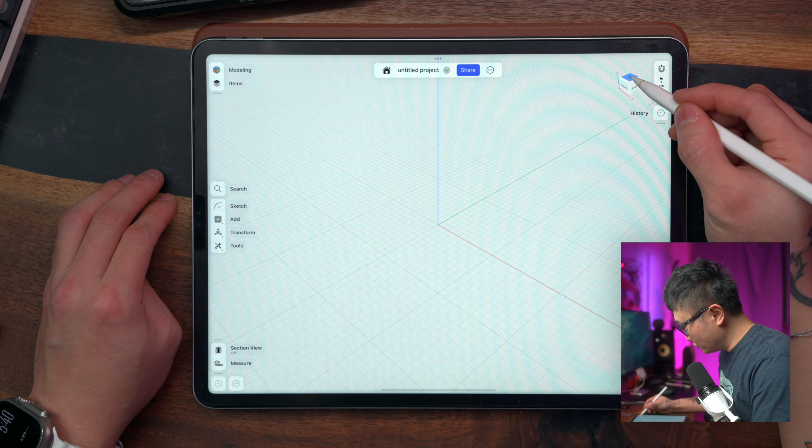We're going to start by going to a top view, and let's zoom out a little bit. Obviously the first thing we're going to do is take some measurements. Let's go ahead and measure this top surface here.

You probably can't tell from the video, but this edge right here is raised up a little bit. If we measure that, it's about 15 millimeters wide. As for the length, we're also just gonna measure to that corner right there. That's gonna be about 25 millimeters.

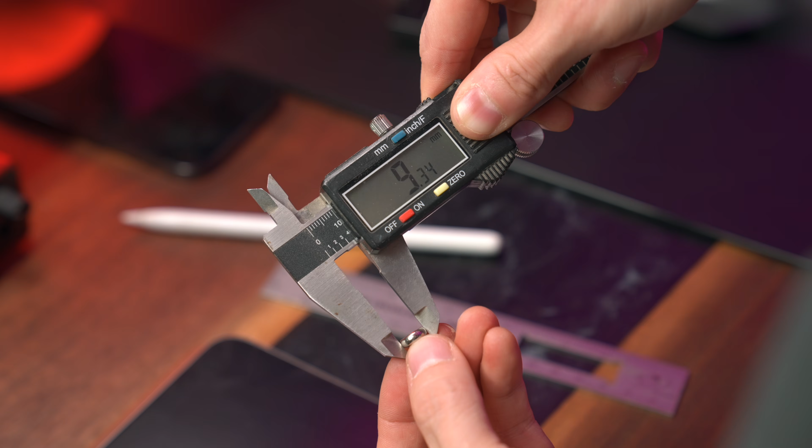Also we're gonna measure the bolt. The shaft is about 10 millimeters long. The diameter is 6 millimeters. The head of the bolt is about 9.4, 9.3 millimeters. And the height of the head is about, let's call it 3.3 millimeters.

All right, now we're ready to go back into Shapr3D. Let's go under Sketch, and we are gonna use a center rectangle.

Make sure that the type is set to center. We're going to start by sketching at the origin, which is different from what we've done in the past, but you'll see why in a second.

So we're just going to drag out like this, and we're going to set our dimensions to 25 millimeters by 15 millimeters, which is the area of the mounting surface that we measured earlier.

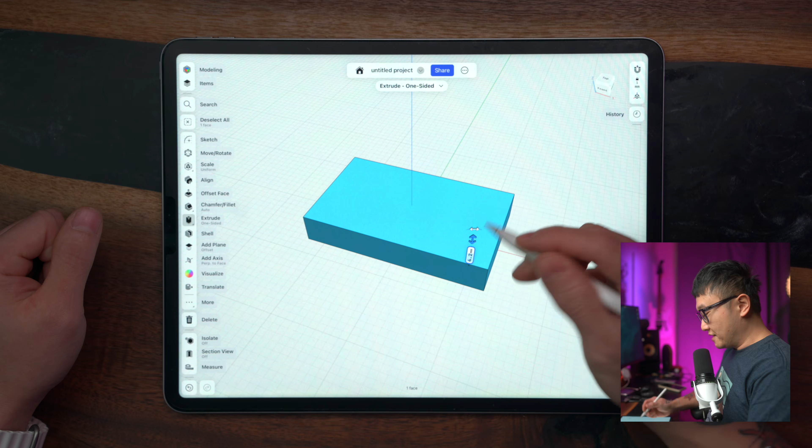Now let's rotate out of that view, and we're going to extrude this up. The length of the shaft of that bolt was 10 millimeters, but we don't have to extrude it that high, so we're just going to set that to 6 millimeters, which should be sufficient.

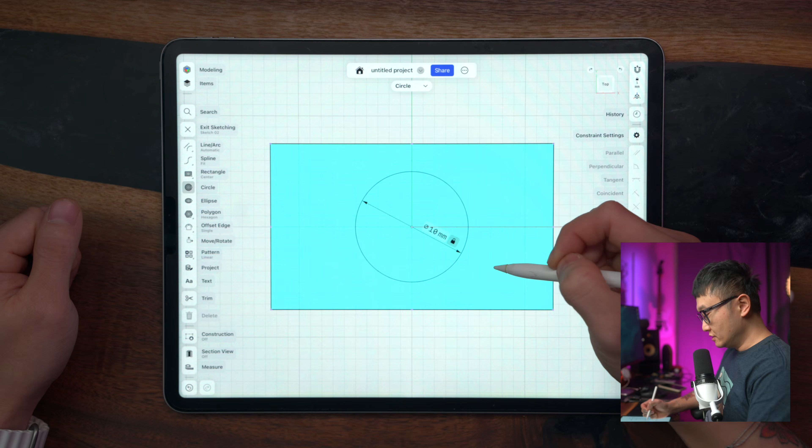Now let's cut the holes for the bolt. Double tap on this top surface, and we're going to use the circle tool. The diameter of the head of the bolt was 9.3 millimeters, so we're going to sketch a circle that is 10 millimeters in diameter, just so we can have some clearance for the bolt to float inside of.

And the height of the bolt head was 3.3, I think, so we're going to extrude that downward 4 millimeters.

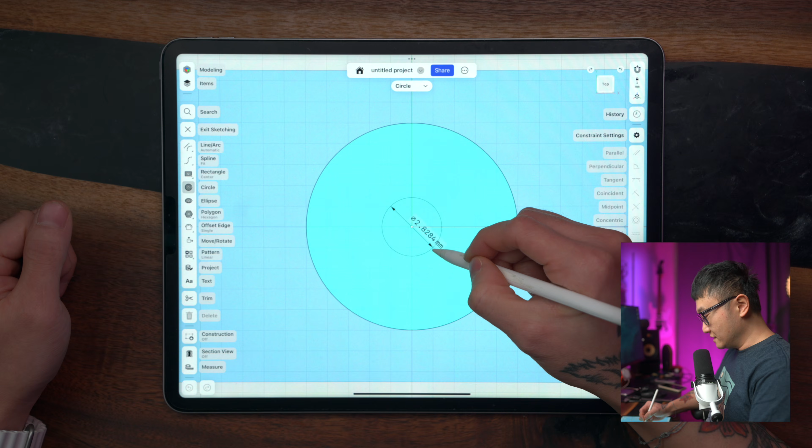Now let's double tap on that new surface we just created, and we're going to draw another circle on the inside. This is going to be the hole for the shaft of the bolt, which had a diameter of 6 millimeters, so we'll make that 7 millimeters, once again just to prevent the bolt from binding inside. This time we will push that all the way through.

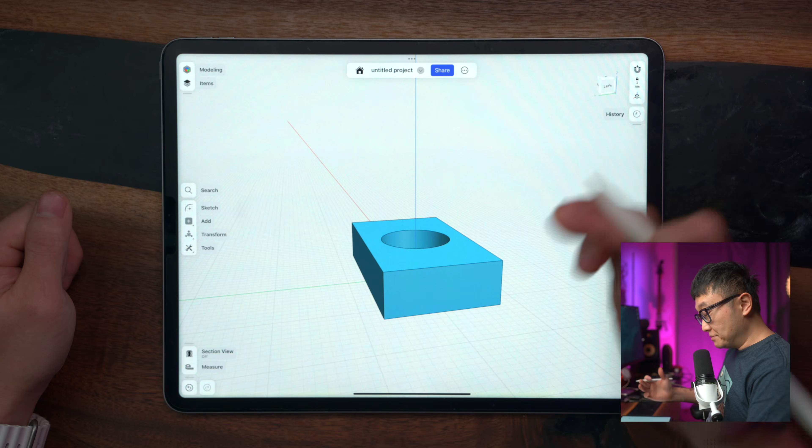All right, so we have our main body. Now, if you remember, there's not a lot of room between the top of the monitor and the bottom of the camera lens, right? So it'd be best if we can route that cable behind the monitor.

So what we're going to do is model a couple clips on the back side of this main body for holding the cable this way. To do that, let's double tap on the side face and start sketching on that. The first thing we're going to do is turn construction on, so that anything we sketch just becomes construction geometry.

We're going to sketch a line starting on this edge right here, and just make sure that we're not snapping to this midpoint right here, because we want to be able to grab this point and move it up and down.

Also notice how this line is not horizontal right now. Tap to select it and use the horizontal vertical constraint to lock it down to horizontal, so that when we grab and move it, it stays horizontal.

The length of this line doesn't really matter, but we can lock it to 15 millimeters, just so that we can lock it in place. Now let's turn the construction off.

Remember, the clip we're going to be drawing is going to look like this, for holding the cable. So we're going to use a circle tool. I already measured the diameter of the cable, and it was 4.4 millimeters. But the circle we're going to draw, let's go back to normal to that sketch.

The circle we're going to draw first is actually going to be 8 millimeters, and we're going to draw it on this line. Once again, make sure that we're not snapping to any other points on this line, because we want to be able to move this point along this line.

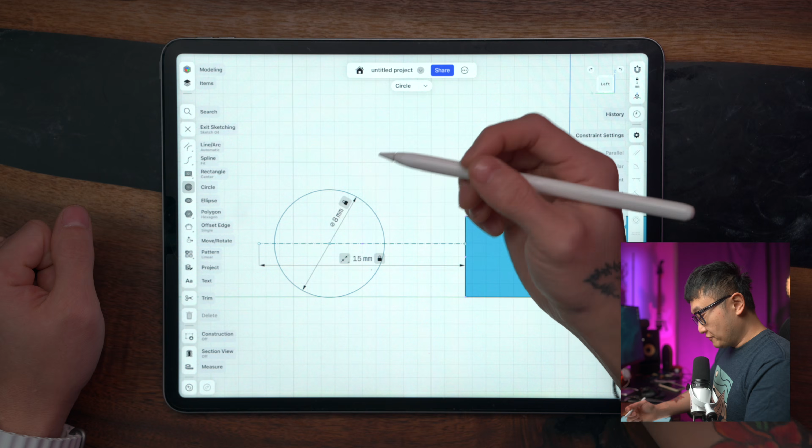And for now, we are going to set this distance from the center of the clip to the edge of our body to 5 millimeters for now. We'll change that later once we see how everything looks.

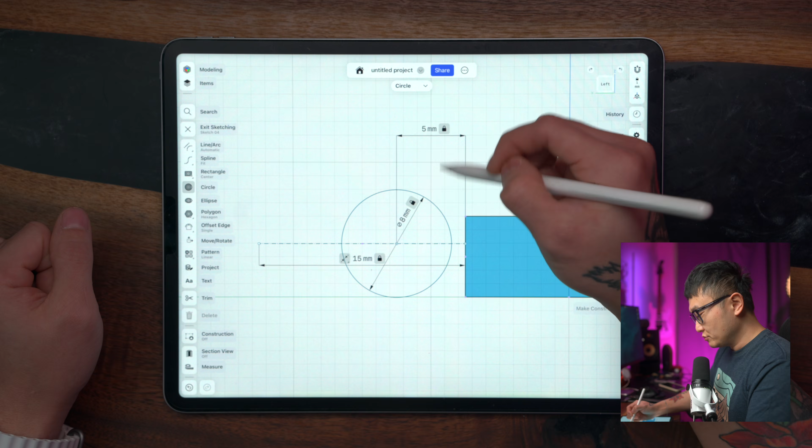Okay, we're going to switch back to the line tool, and we're going to draw 2 lines. Let me zoom in here so you can see better. One from this point on the body to our circle, and another line from this point on the body to our circle. We want to make both of these lines tangent to our circle.

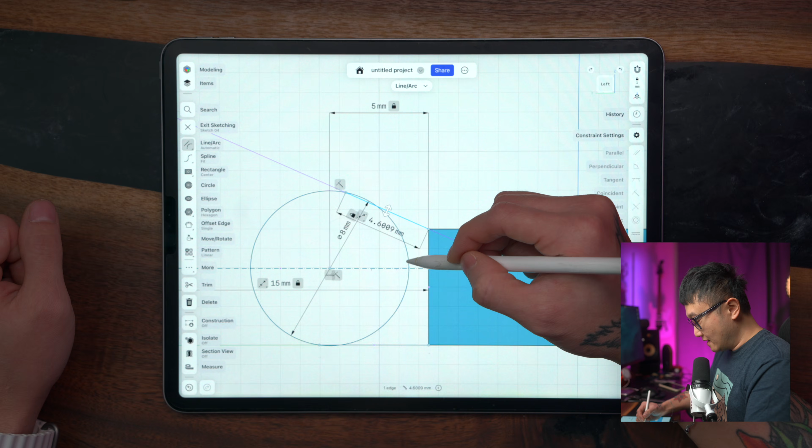So let's select this line and the circle, and we're going to use the tangent constraint over here. And we're going to do the same to this other side as well.

Now let's switch back to the circle tool, and we're going to draw another circle inside this larger circle, starting from that same center point. This time we're going to make that circle 4.5 millimeters. This is the circle that's going to actually hold our cable, so it's just slightly larger than the diameter of our cable, for tolerancing.

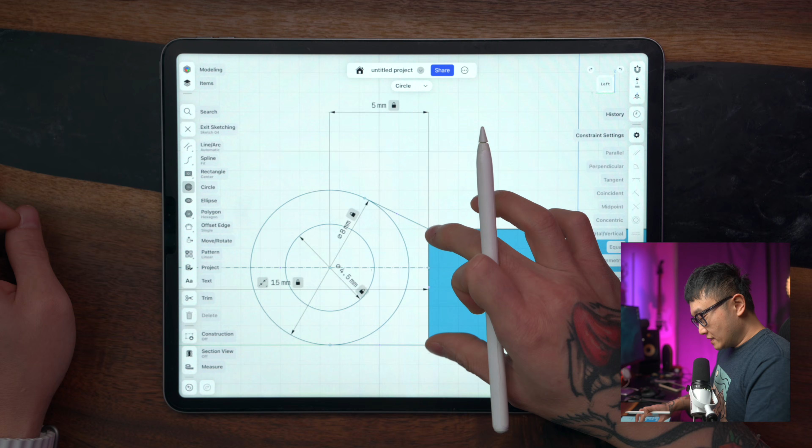Once again, we're going to switch back to the line tool. Sorry about all this switching back and forth, but it is what it is. We're going to draw 2 more horizontal lines on either side of the construction line we drew earlier. Just make sure that they're horizontal.

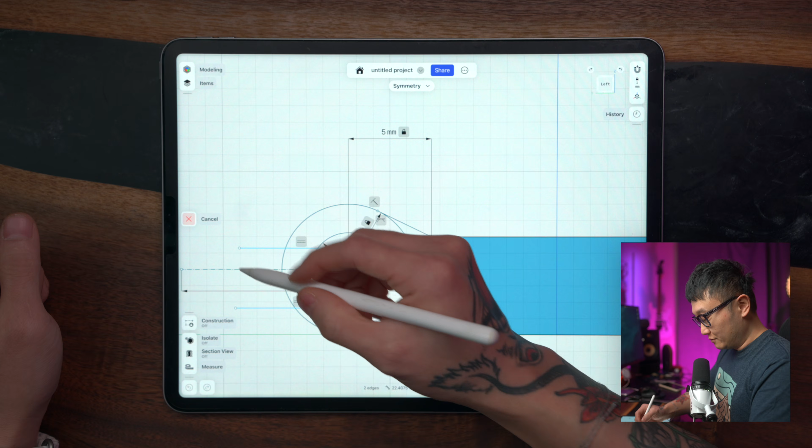Select both of these and use the horizontal vertical constraint. Also, we want to make sure that both of these lines are symmetrical about that construction line. So select both lines, then use the symmetry tool over here, and tap the line that we want both of these lines to be symmetrical about.

You see how they shifted, right? Okay, so now if you select one of these lines and move it around, you see the other line moving with it, right? All right, cool.

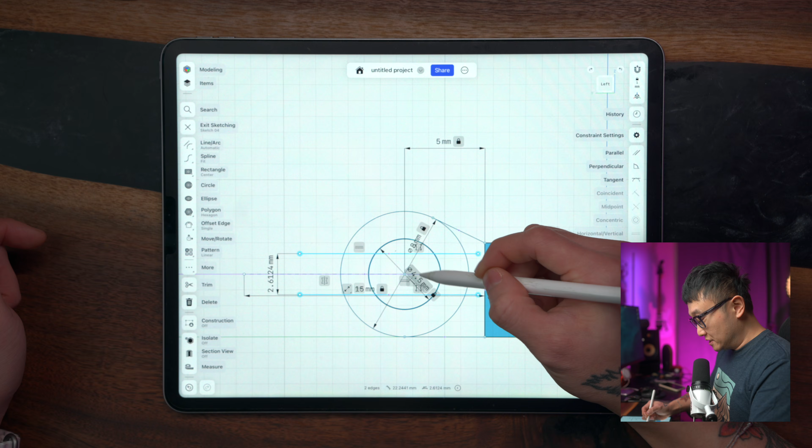Now we want to set the dimension between these two lines to be 1 millimeter smaller than the diameter of the circle. So we're going to set that to 3.5.

Just so you know, I am completely guessing about these values. I have no idea if these are going to work. We're going to print it, test it out. If it works, great. If not, we're going to come back, make changes, print it again, test it out, and so on. It's just how engineering works.

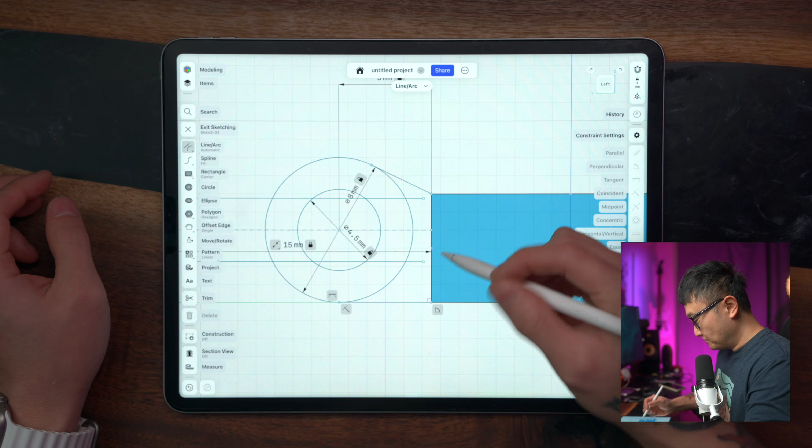But you guys remember that we have this raised lip on the mounting surface of the monitor, right? That means we can't have this clip coming straight out like this, which was why we made this construction line floating. So we can just grab this end and move it, or... okay.

I was wrong. So somehow, maybe it's because we locked this. Let's unlock that. And now let's try to move it. Still no? That's weird. So something is locking it in place.

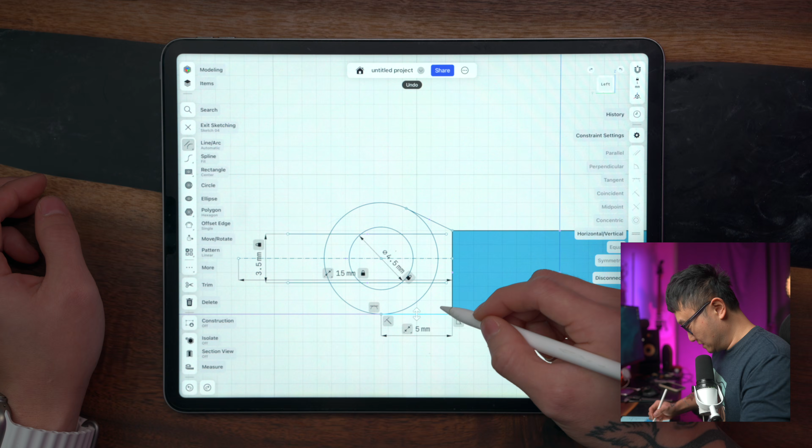Oh, you know what? For some reason, this line here is horizontal. Let's undo that real quick, bring back all the other constraints. It's because of this constraint right here, this 90-degree constraint. So let's get rid of that guy.

Select that constraint and use this delete constraint right here. I don't know if you guys have the same constraint, but I did when I made this. So that's why I couldn't move this.

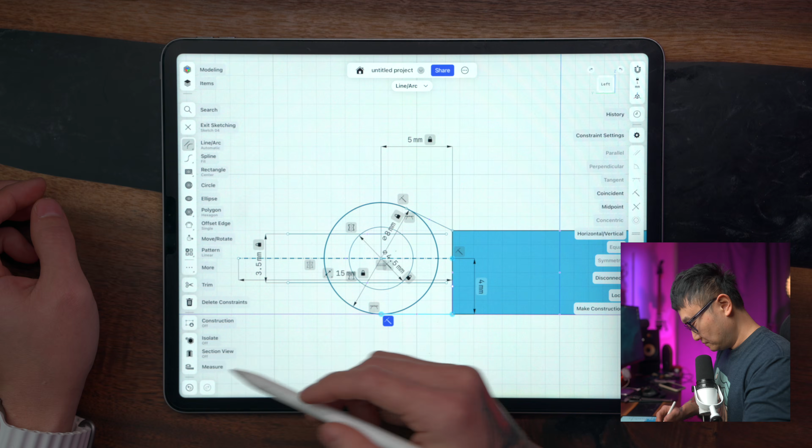So now, okay, still no. Maybe it's this one right here. So I'm going to delete that constraint. Let's try again. There we go.

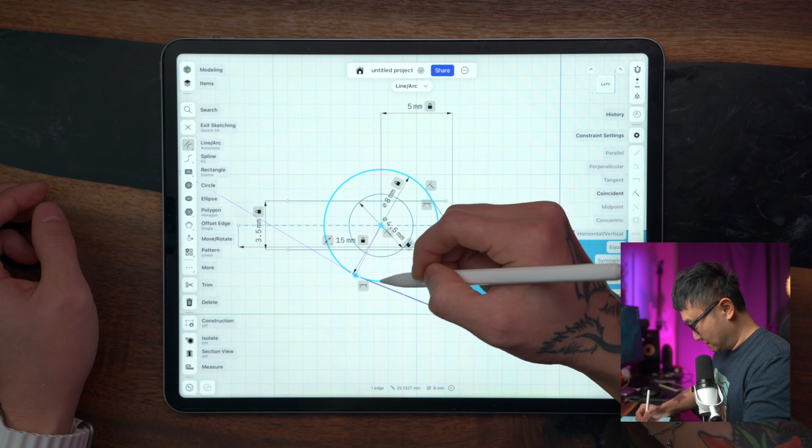For some reason, make sure that these two are coincident again. Those two constraints were messing with each other. Okay, now everything's back to normal. It was mainly that 90-degree constraint I had there.

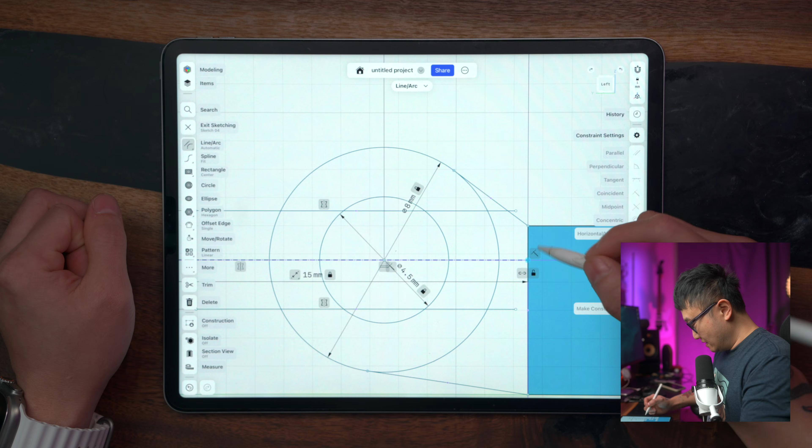This was the main reason why we left this one floating, so that we can move this one around and get away from that raised lip on this monitor right there. Let me zoom in here. I want to move this as high as possible without it actually snapping to that top corner, so I'm going to set this distance right here to 0.5.

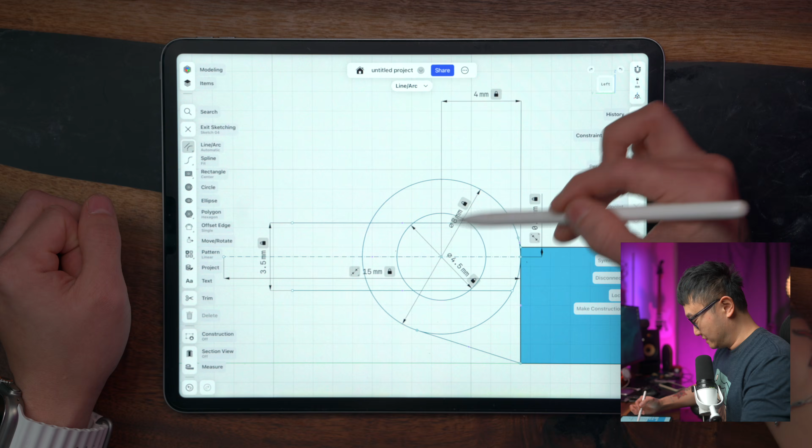I also don't think this clip needs to stick out this far, so let me see if I can change this value as well. I'm going to change that value to 4. So basically it's almost tangent. Oh yeah, it is tangent to that edge. Everything looks pretty good now.

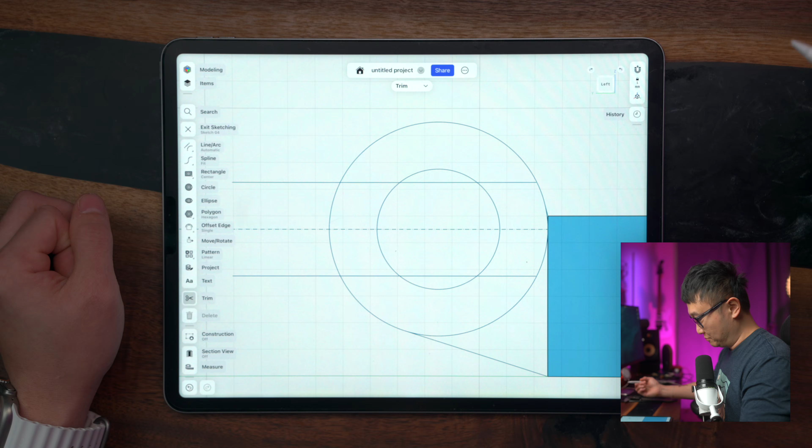I'm going to use the trim tool now to cut away everything I don't need. So let's select the trim tool. Let me zoom in here so you guys can see how I'm trimming this. It's a little hard to visualize exactly what we need to trim away, but the best way is to just start with the things that are obvious that we don't need.

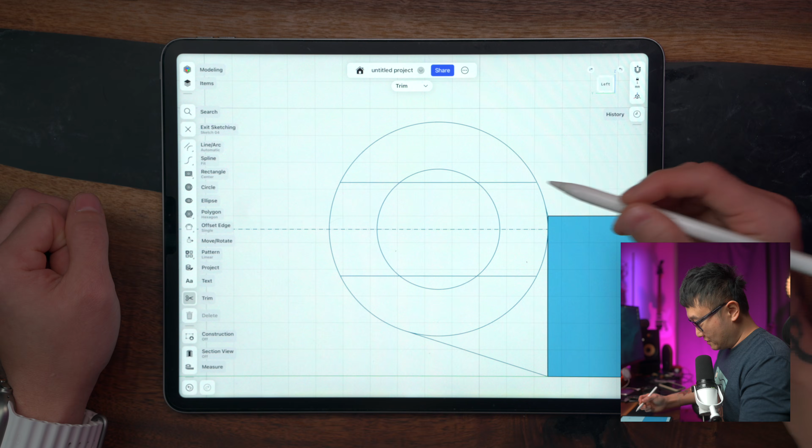So things like this - oops, there we go. Things like this, definitely don't need that. So we have the clip coming out like this, definitely don't need that. The cable is going to sit in here, so definitely don't need that.

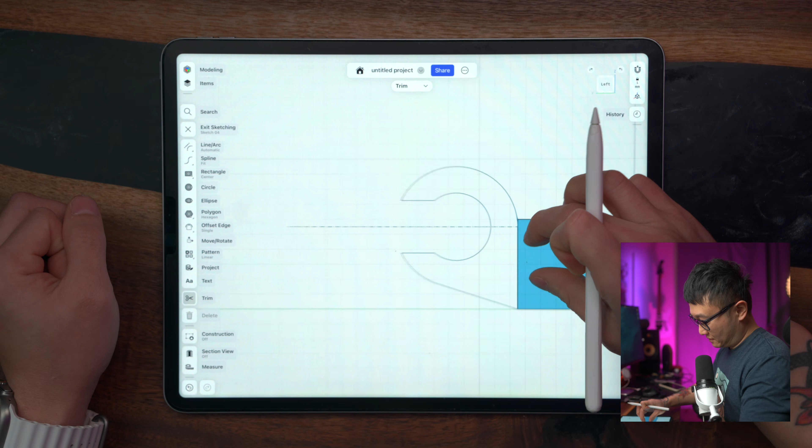There we go. The clip is going to look something like that. And don't need this. All right, that looks pretty good.

Drop the trim tool. I think one last thing I don't like is this corner here because of how sharp, how abruptly it ends with the body. It's going to cause a lot of stress here. I mean, it's not going to see a lot of stress, obviously, but still, I just don't really like it.

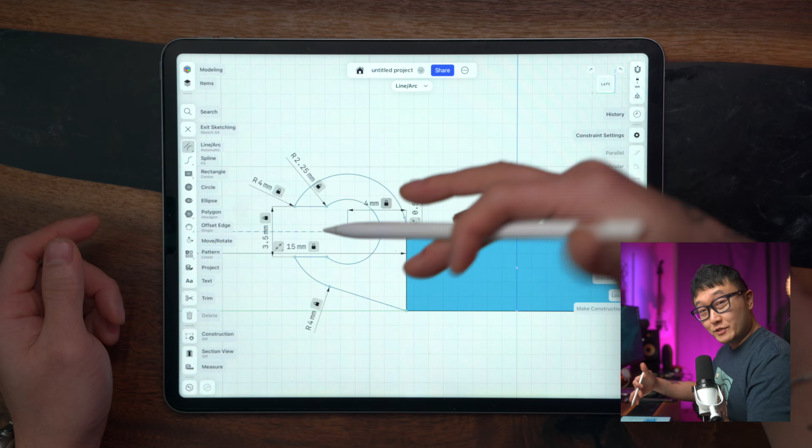I think what I want to do is draw a line. Oops, yeah, I need one of those sketching gloves. But it's actually a good idea - if you use the iPad with Shapr3D a lot, it's probably a good idea to get one of those gloves.

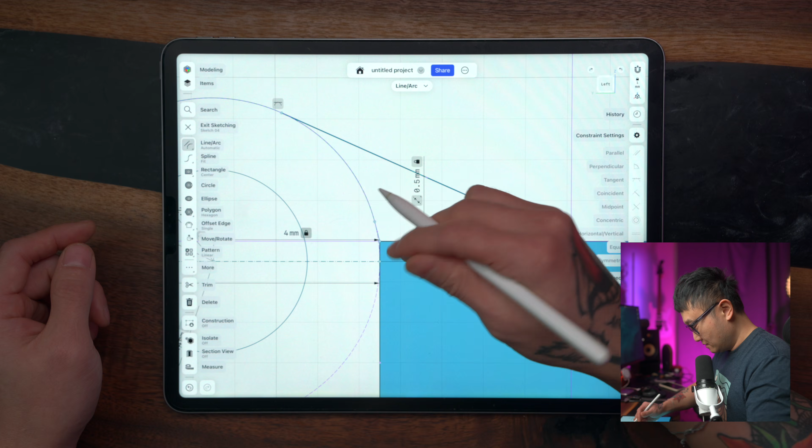I'm going to sketch a line from the top of the clip to the top of our body like this. Let's select that line and the top of the clip and make them tangent to one another. Let's set the distance between that point and that corner.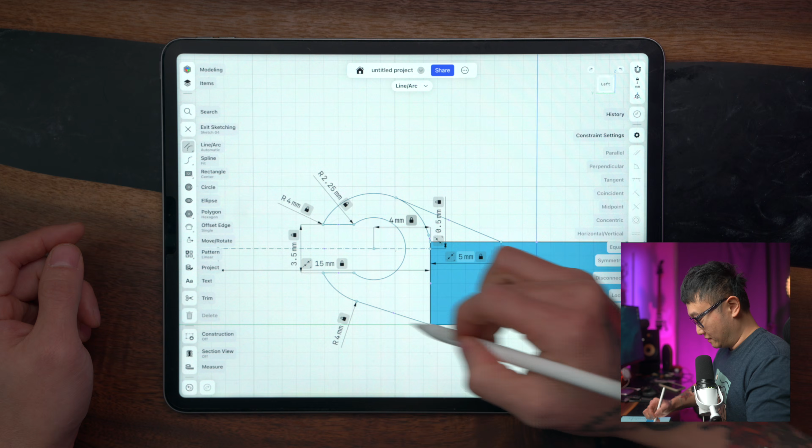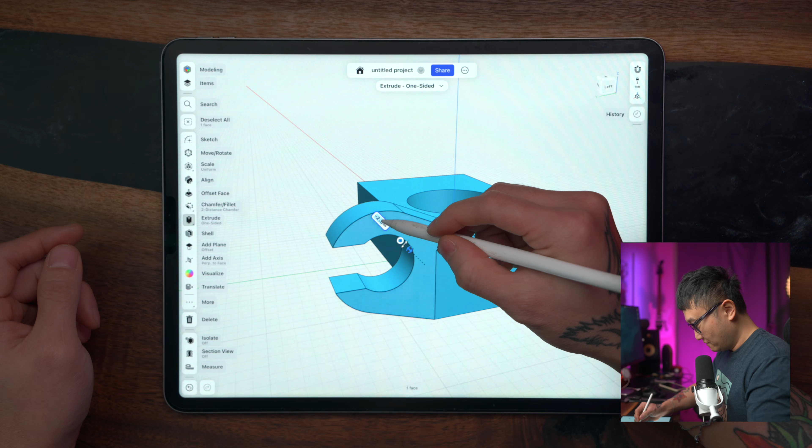Yeah, let's do 5 millimeters. So that's almost parallel to the bottom face, right? And let's go back to the trim tool again and trim away this stuff that we don't need. Oh yeah, and I think we need to close off this sketch here. Okay, now let's exit the sketch. And we're gonna extrude this guy out 5 millimeters. Okay, that looks pretty good, I think.

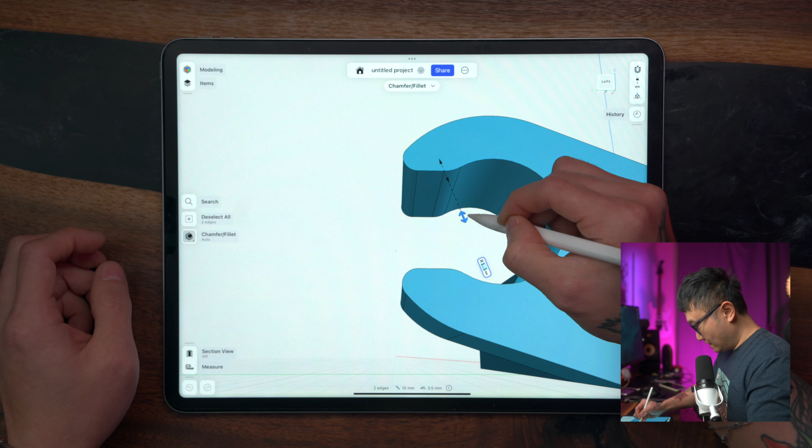Let's add a couple of roundovers to finish up this guy. So for these outside edges, we're going to do 0.5. That looks pretty good. And then for these two inside edges, yeah, 1 millimeter looks good. All right, now let's double tap on this guy. And here's the reason why we model this at the origin.

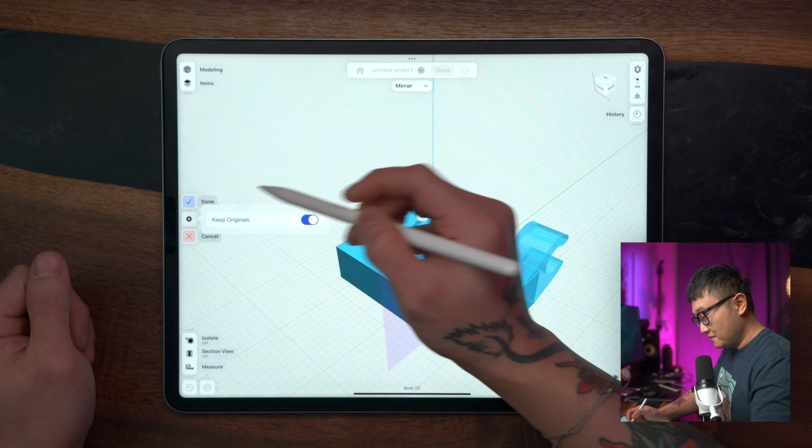So now we can use the mirror tool. Now we can simply use this plane right here at the origin to mirror this guy over. We don't have to create a separate plane. So it just makes things a lot easier when you're creating stuff like this. And make sure that Keep Originals is on and click Done. There we go. Our part's almost done.

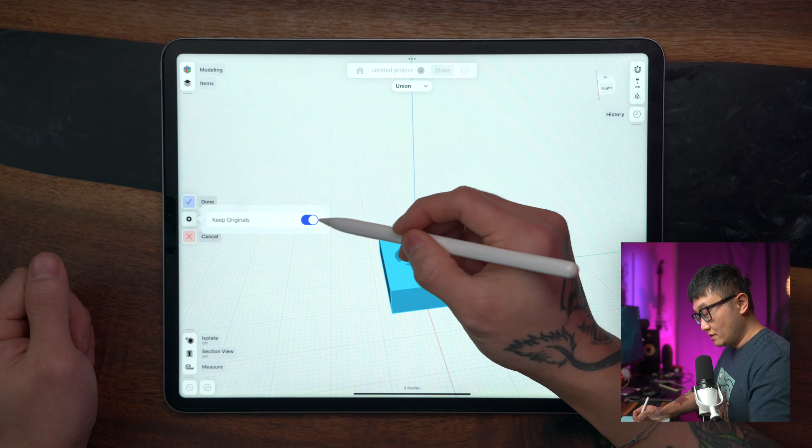Now all we have to do is drag to select everything. And we're going to come down and use the Union tool to combine them. So when you're using the Union tool, we have the option to select Keep Originals on or off. So if you open up the Items Manager, you see we have 3 parts selected, right? If you keep Originals on and you click Done, we have a 4th part now. So we have the 3 original parts and a 4th part that's a combination of all 3.

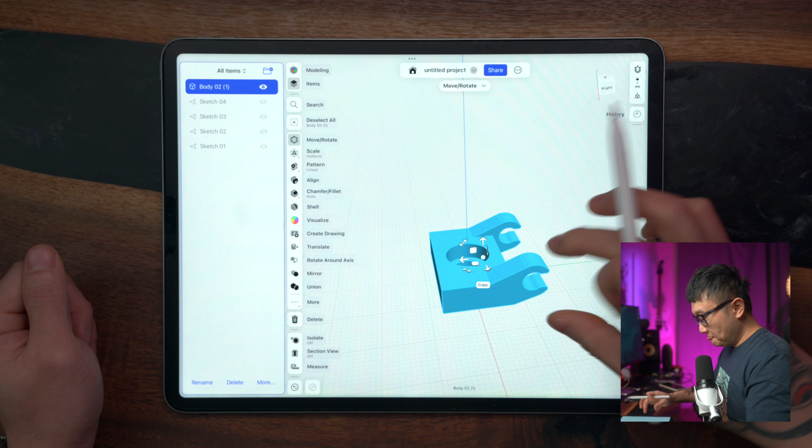But let's undo that real quick. If we select all of them, use the Union again, if we do Keep Originals off, click Done, then we just end up with 1 single part. For this particular example, since this is our final part, I'm just going to keep Originals off. It really doesn't matter. But just keep that in mind, depending on what project you're working on. Sometimes maybe it's a good idea to keep the Originals on if you want to do any modifications and stuff like that. But now let's add some roundovers and finish this guy up.

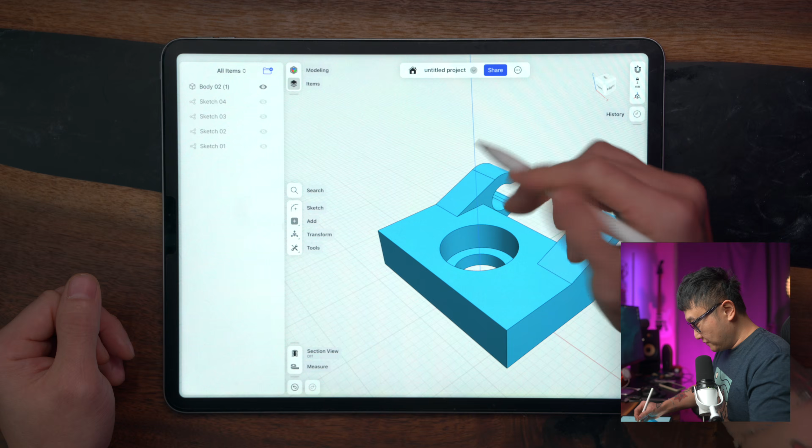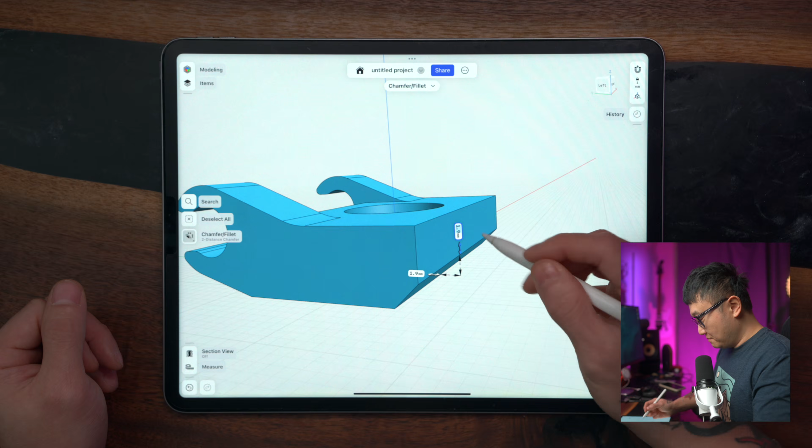Let's select those. Let's close that up. Let's do 5 millimeters for that. And I'm also going to add some chamfers. I'm a really big fan of the 2-distance chamfer because they're a lot more fun than just a boring 45-degree chamfer. They're sharper and you can modify the values in the history sidebar here. And they just look a lot cooler. Oops, let's make that 2 and make this 3. See? They just look a lot cooler, right?

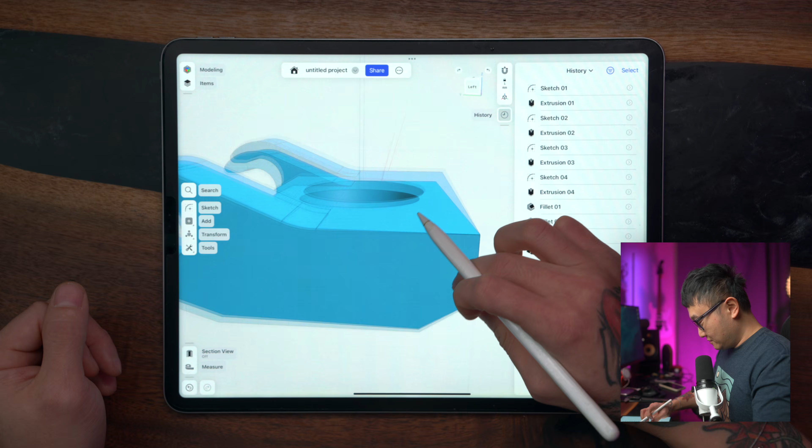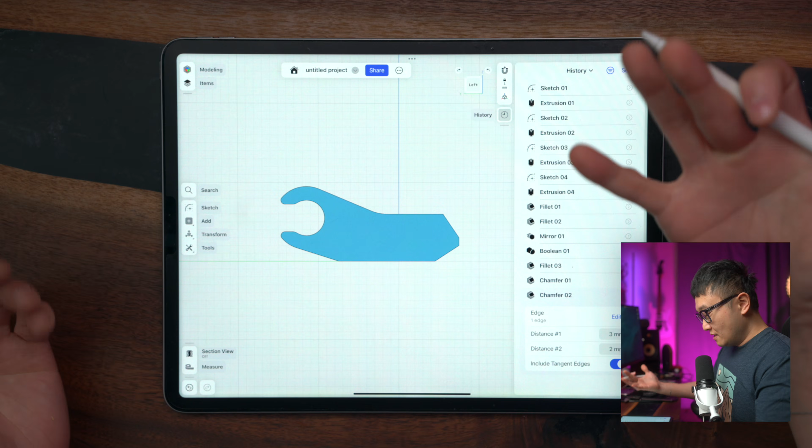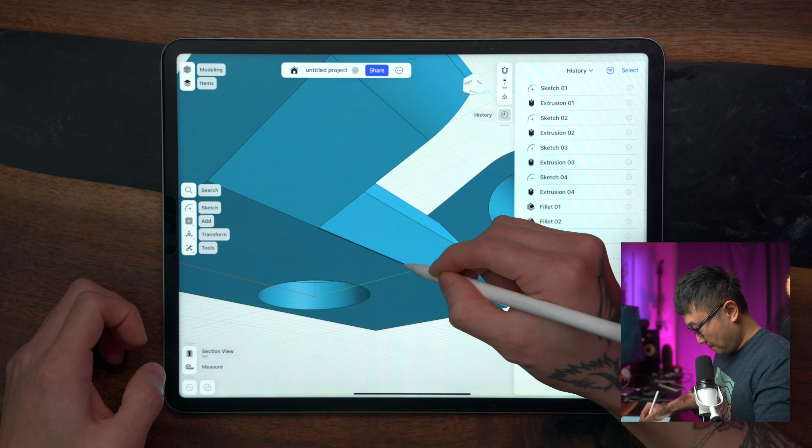Let's do the same thing to the top as well. So we'll make the top maybe 2, and then make the bottom 3. Something like that. Yeah, you just get a lot more freedom with it, and it just looks more custom. See what we can do with this. Oh, I don't like this. I think something's weird with our sketch. The way the bodies are combined together, it's not letting us create a chamfer down here.

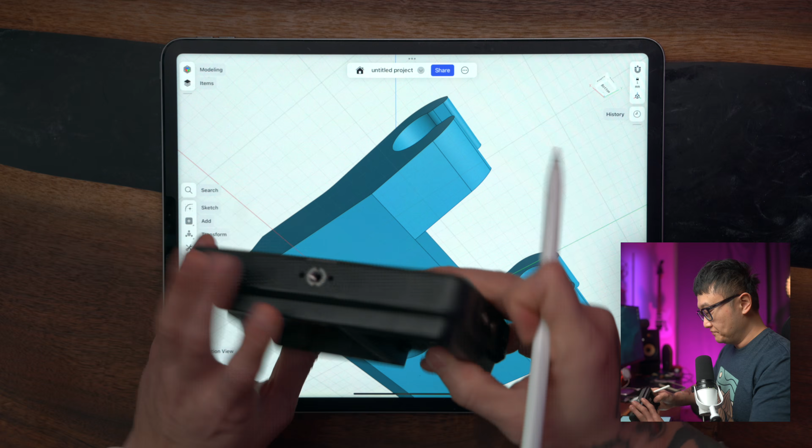That concerns me just because this is going to be right on that lip that we have right here. I want to make sure that we are definitely going to get away from that lip. And this is why I'm really glad that in Shapr3D, our sketches are directly linked with our bodies. So we can come back in here and make changes a lot easier. So let's go to our history sidebar and come to the sketch that controls that part.

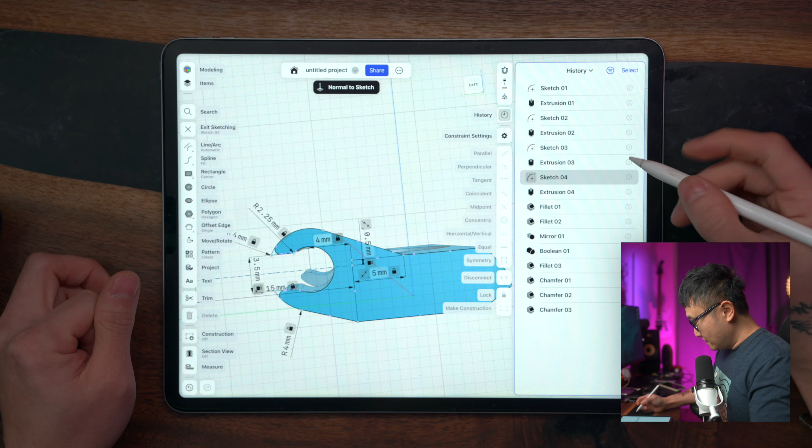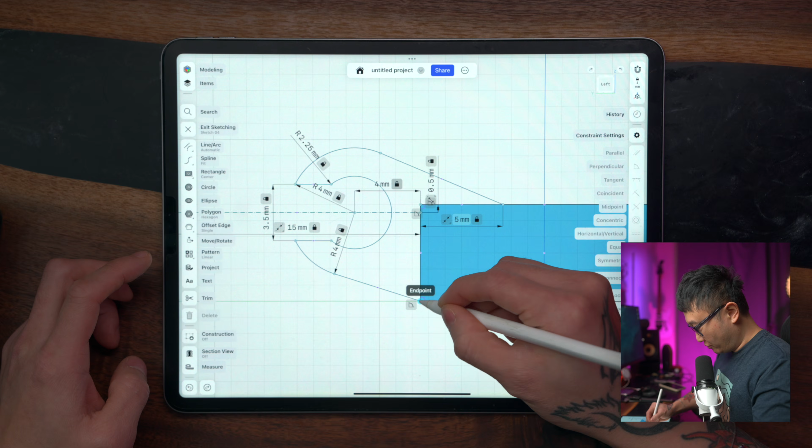And what we can do is hold down on that sketch, and we are going to insert a breakpoint. Once we do that, it hides all the steps below it so that all we see is that sketch. So we're going to just focus on that. And let's go normal to that sketch. So I'm going to tap on that point right there, and I'm going to see if I can move that point. Why is that? Okay, there we go.

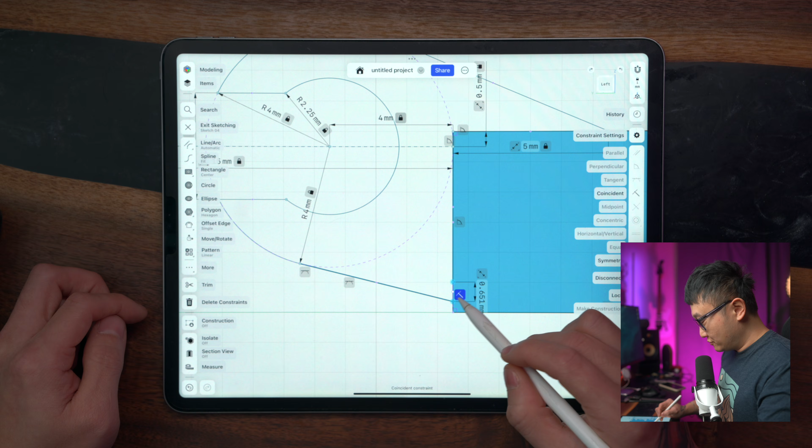If that point for you is locked on there, what you have to do is select that constraint right there, and you want to delete that constraint, okay? That's the coincident constraint. Once you delete that constraint, you'll be able to move it along that line. As you're moving it along that line, just make sure that you're not changing anything else, that this thing isn't flying off the page. If all the other constraints are done correctly, you should be able to move this around, and the only thing moving is this point right here. Oops, my bad. So it should look like this.

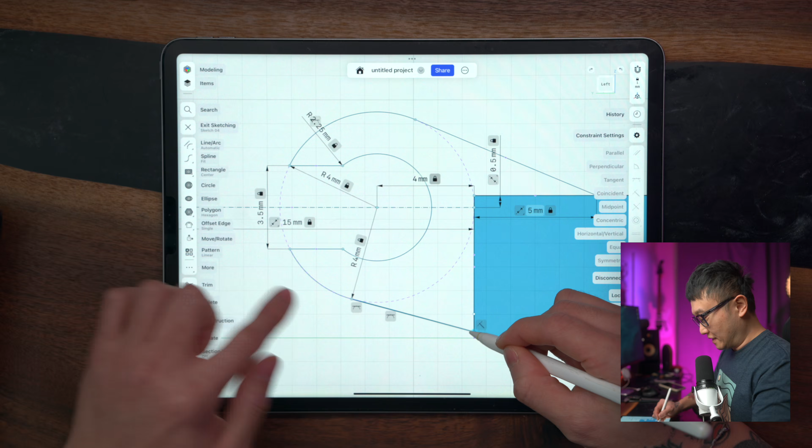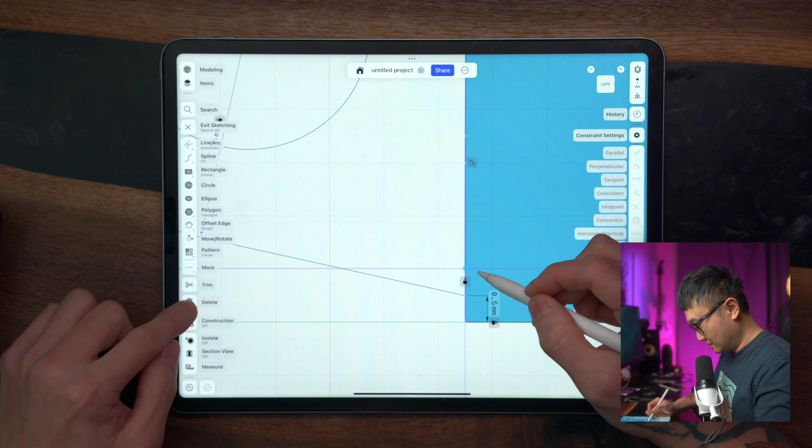I'm just gonna make this distance 0.5, like that. I don't know what that point is right there. I'm just gonna delete it. So I'm basically just getting it off that edge. Let's exit that sketch. And I'm going to get rid of that breakpoint. Once I get rid of that breakpoint, you see that whole tree refreshes, my part basically refreshes, and you see the whole part updates, right?

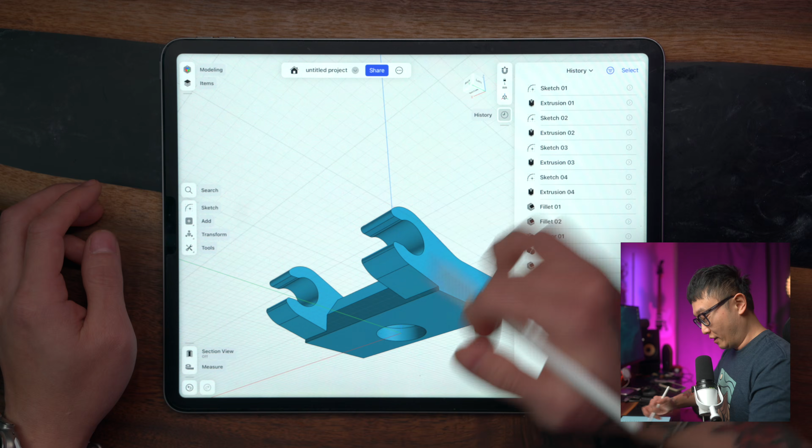That's a great thing about parametric modeling. Such an easy process, right? Okay. Now we should be able to add a chamfer down here without any issues. So let's drag this bottom chamfer back. See what we can do, how far we can drag this guy.

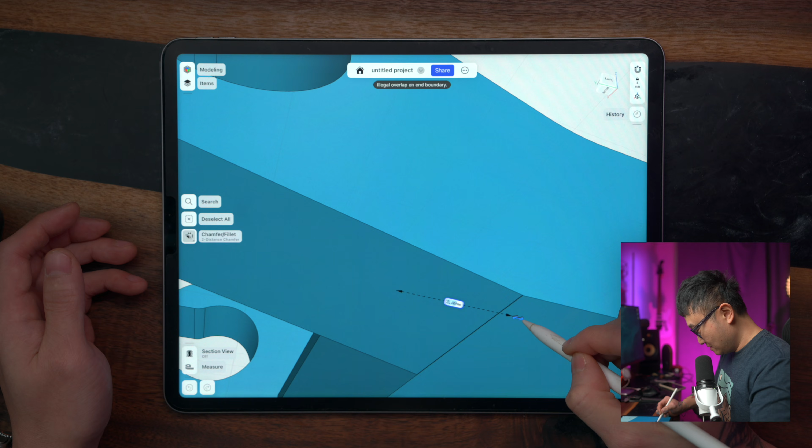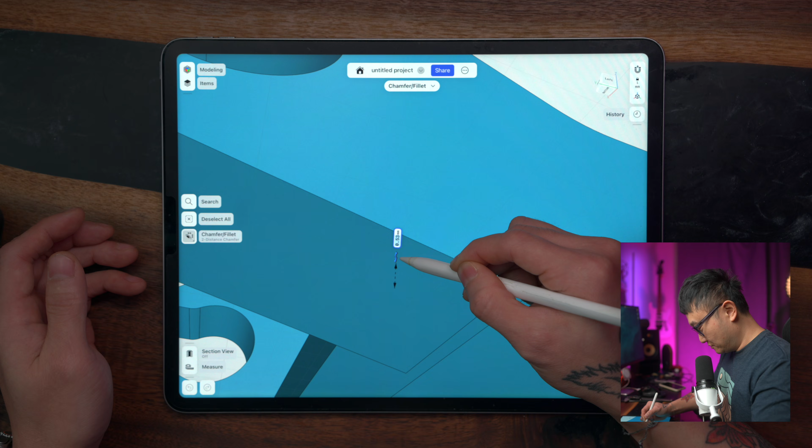Oh, let's see, 2.3. Oh, 2.2, it looks like, no, we should be able to do more. Doesn't want to. Illegal overlap. Oh, that's interesting. Let's do 0.5. Oh, there we go. There we go.

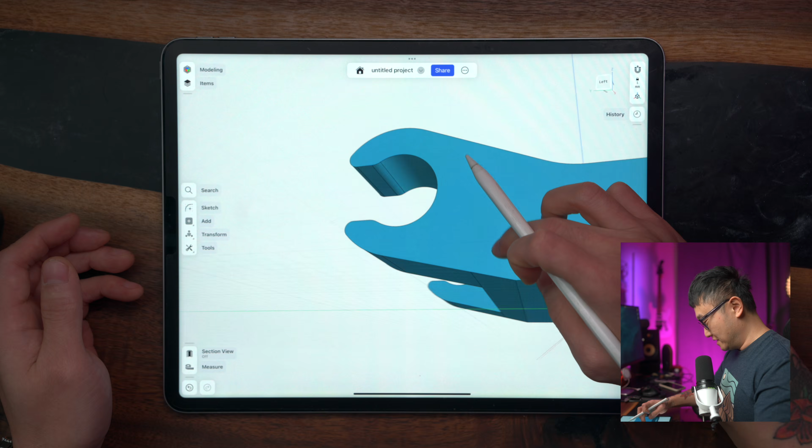Look at that. It's almost tangent. It looks like it's tangent to this now. That's perfect. This will definitely get it off that edge. All right, that looks great. Yeah, that looks great. I don't like how we barely have any material there.

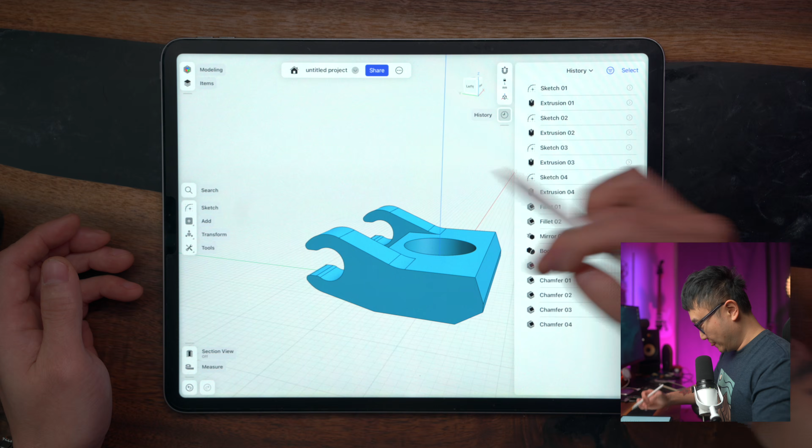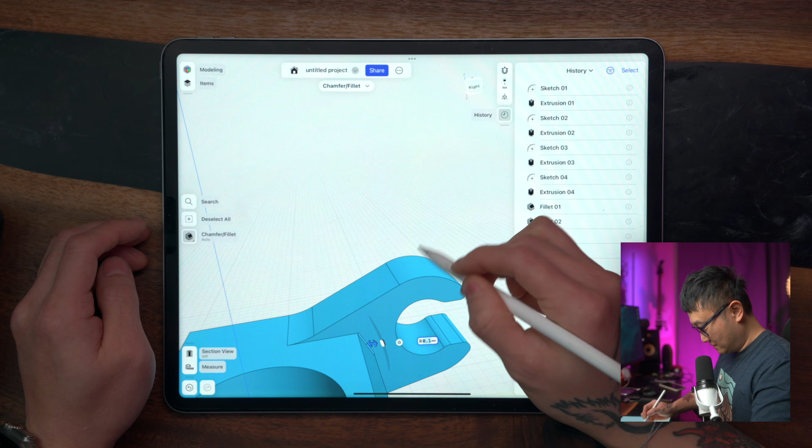I'm just gonna adjust that real quick. Just probably make that 1 millimeter. Do the same thing over here, make that 1 millimeter. So we just have a slight chamfer like that. Actually, probably make that 2, yeah. Okay, yeah. I don't think we really need any roundovers here. We'll just leave this the way it is.

All right, I think I'm pretty happy with the way it is now. Let's go ahead and export this for 3D print. So the way to do this is go up here to Share and go to Export, Export Project. And usually for 3D printing, I use 3MF. And instead of clicking on export, what I like to do is click on here, and I just airdrop it to myself. It's the quickest, easiest way to do it. And I just airdrop it to my desktop right here. So let's switch over to the desktop.

Just so you guys know, I am by no means an expert in 3D printing. I don't print a whole lot. The 3D printer I have is a Bambu Lab X1 Carbon. So once I'm on the computer, I'll just grab the file and I'll drag it into Bambu Studio, and that'll launch the program and open up our project. So we'll click on Slice Plate, and let's minimize that real quick. And as you can see, let's zoom in here real quick.

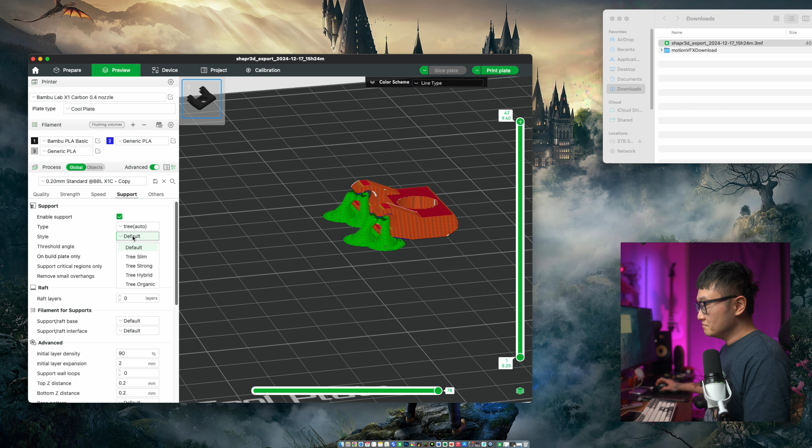Since our clips don't have anything underneath them, it does require some supports. So hopefully this thing isn't gonna come out really ugly since our part is pretty small, but we can make some adjustments here. So come under support and let's make the tree slim. So the tree is just a little bit smaller. So hopefully that'll come out looking a little bit better. And maybe we'll support the critical regions only.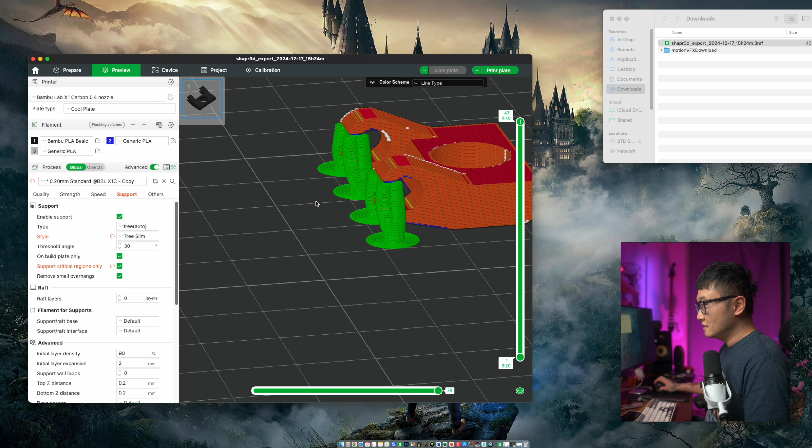Since these supports are also where we are holding the cable, I'm kind of worried that once we take the supports off, there's going to be some residual material left in here that's going to make it hard for us to put the cable in there. But yeah, a little bit of sanding will probably fix that. Let's see what else we can change in here. Oh, for this guy over here, this is a tower. This is just for making time lapses for me. Let's see, we can probably make that smaller just to save some material.

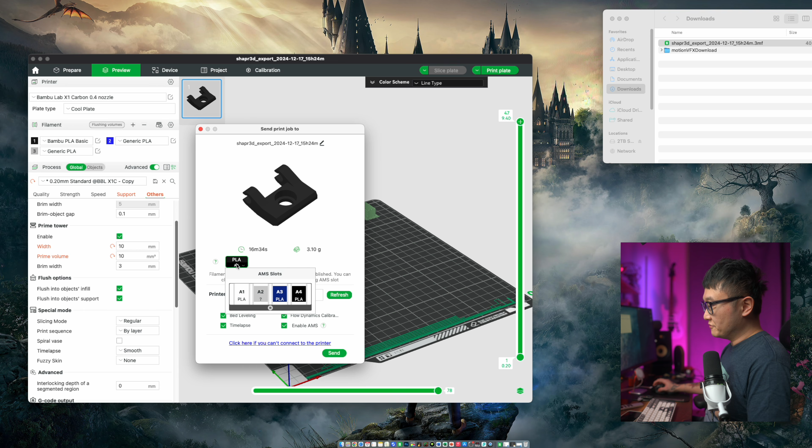Okay, yeah, so everything looks pretty good. Let's go ahead and click print plate. Oh, for material, I'm gonna select this one. This is the orange color. I think that'll go pretty well with the purple. So let's go ahead and send it over to the printer.

So it's actually been a few days since I finished the project, hence the change in clothes. I've just been really sick and my throat's still not 100%.

But anyways, this project actually came out better than I expected because one, we didn't have to make any further changes to the size of the clips to make the cables fit. Two, the part cleared the lip on the mounting surface perfectly. And three, and this is the best part of all, I realized after I assembled everything, if we had designed the arms to hold the cable further back or at a lower angle, it would have interfered with the insertion or removal of the SD card, which was not something I even thought about when I was modeling that part. So I'm so glad that came out perfectly.

Yeah, as you can see, this is my favorite way of using Shapr3D. This was what made Shapr3D my favorite program to use. Just being at the location of the problem with my iPad, with my measurement tools, and just model right on the spot. I mean, with this particular problem, I just happened to be at my desk with my computer, but I'm sure you can easily imagine and probably experience having a practical problem and not having easy access to a computer. So with Shapr3D and iPad, you completely eliminate the need to run back and forth between the problem and your computer, saving a ton of time and money.